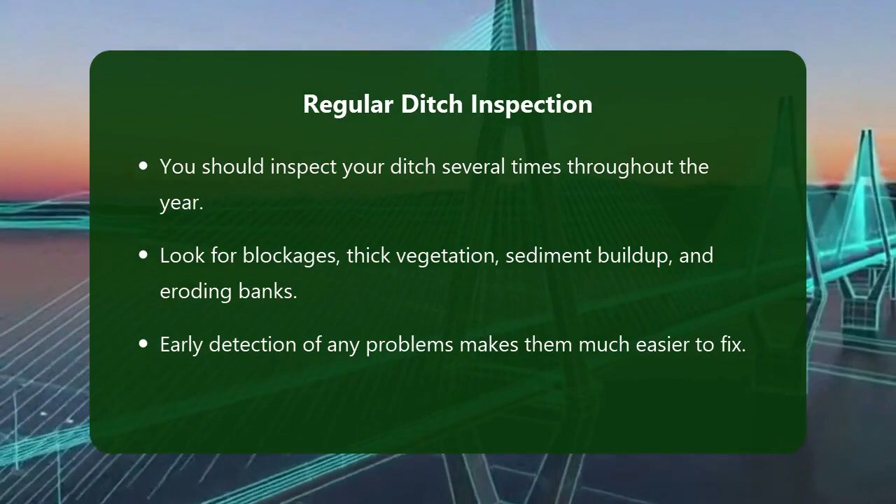Maintaining a drainage ditch is a critical task for managing water and protecting property. A drainage ditch is designed to channel excess water away from fields, roads, and buildings, preventing flooding and soil erosion. Proper maintenance ensures it functions correctly.

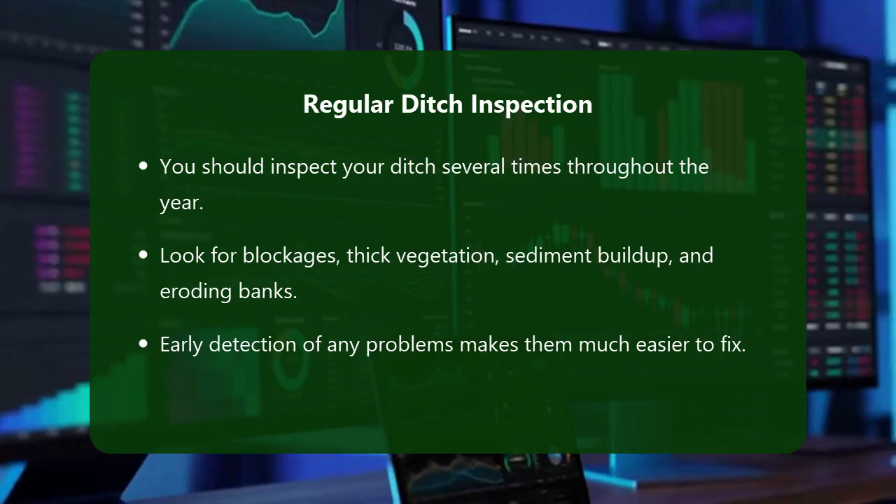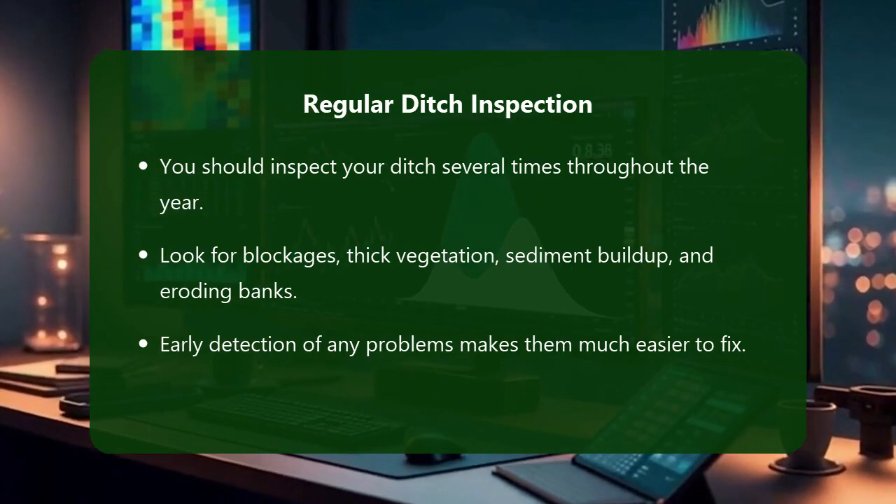The process begins with regular inspection. You should inspect your ditch several times a year, especially after heavy storms. Look for obvious problems. Are there blockages from trash or fallen branches? Is vegetation growing too thick? Has sediment filled the bottom of the ditch? Are the banks eroding or slumping? Early detection makes problems easier to fix.

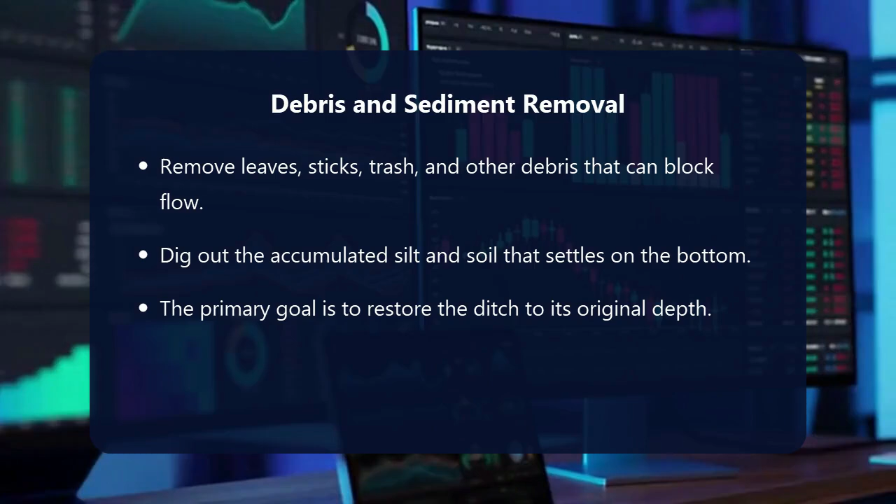The most frequent maintenance task is clearing debris. Leaves, sticks, plastic bottles, and other trash can quickly create a dam. This dam causes water to back up, potentially flooding your property. Use a heavy-duty rake or a pitchfork to pull out this material. For larger debris like big logs, you may need more powerful equipment. Always dispose of the removed debris properly and away from the ditch.

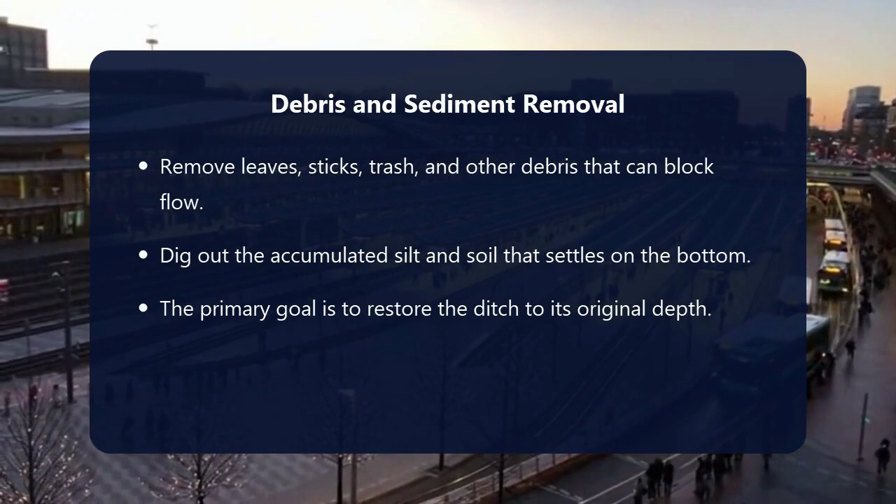Next, you must manage vegetation. A healthy cover of grass on the ditch banks is good. It helps hold the soil in place and prevents erosion. However, tall weeds, thick brush, and small trees are a problem. They slow down water flow and can catch more debris. Their roots can also damage the ditch's structure over time.

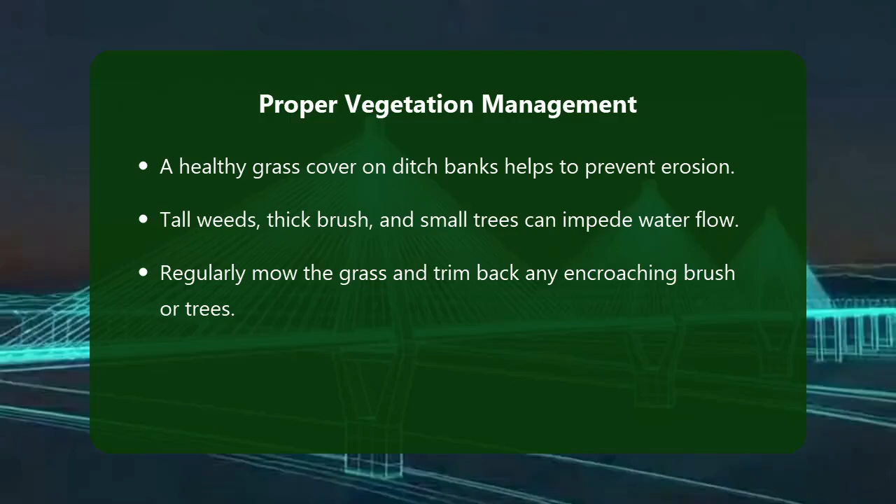You should regularly mow the grass along the banks. Trim back any encroaching brush. Small trees should be removed completely, including their root systems if possible. Be careful when using herbicides, ensuring they are approved for use near waterways.

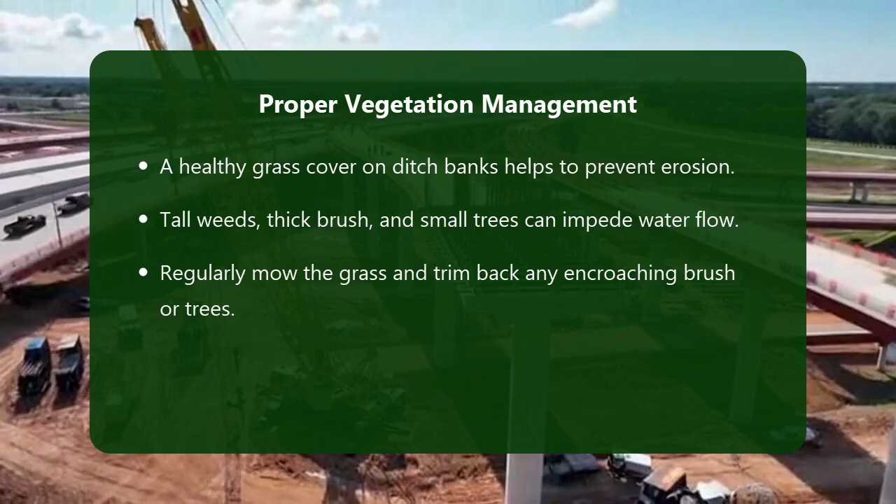Another key step is removing sediment. Over time, silt, sand, and soil will wash into the ditch and settle on the bottom. This buildup reduces the ditch's depth and its capacity to carry water. You will need to dig this sediment out. For a small ditch, a shovel and wheelbarrow might be enough. For larger ditches, you may need to hire a contractor with a mini excavator. The goal is to restore the ditch to its original design depth and slope.

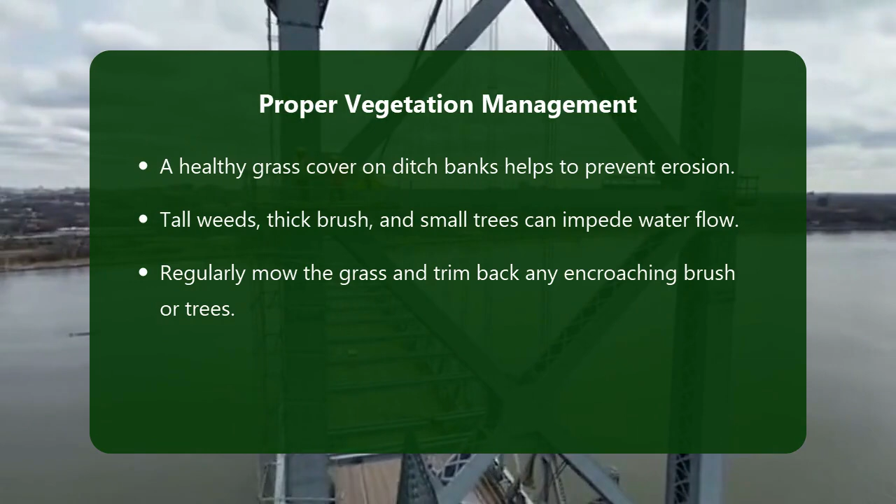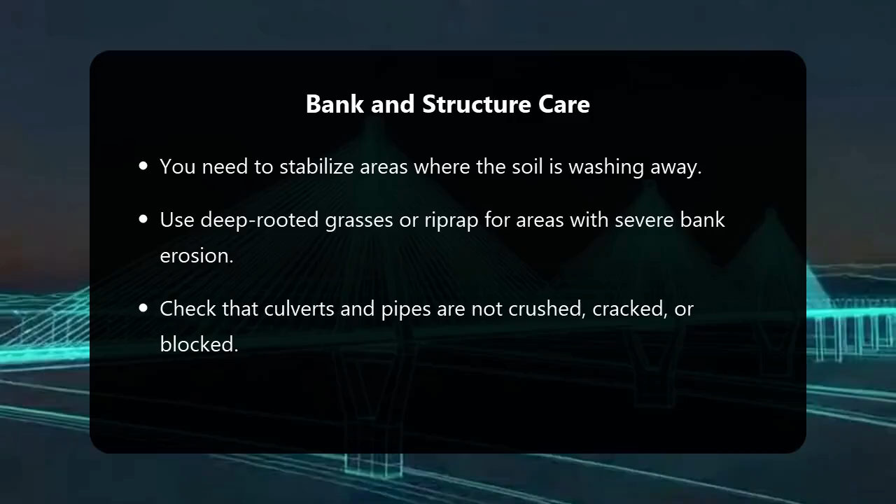Pay close attention to the ditch banks. If you see areas where the soil is washing away, you need to stabilize them. Unstable banks contribute to sediment buildup and can eventually collapse. Planting deep-rooted grasses is an effective, natural solution. In areas with severe erosion, you might need to install riprap, which is a layer of large stones, or use

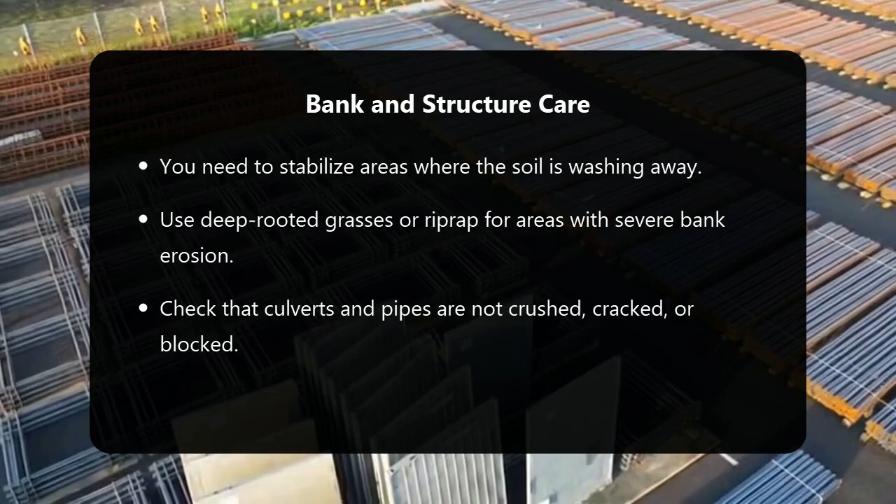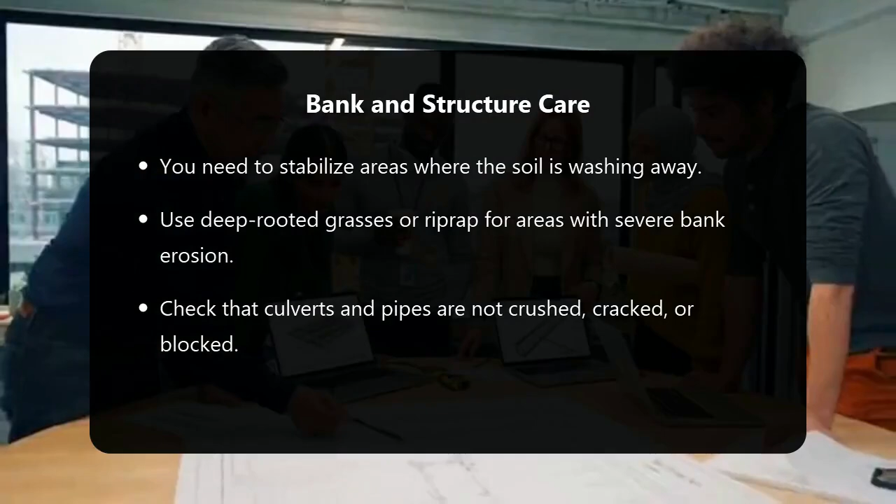erosion control matting. Finally, check any structures like culverts or pipes that are part of the ditch system. Ensure they are not crushed, cracked, or blocked. A blocked culvert is a major cause of localized flooding. Keeping your drainage ditch clear and well-maintained is an ongoing responsibility, but it is essential for preventing water damage and preserving the value of your land.